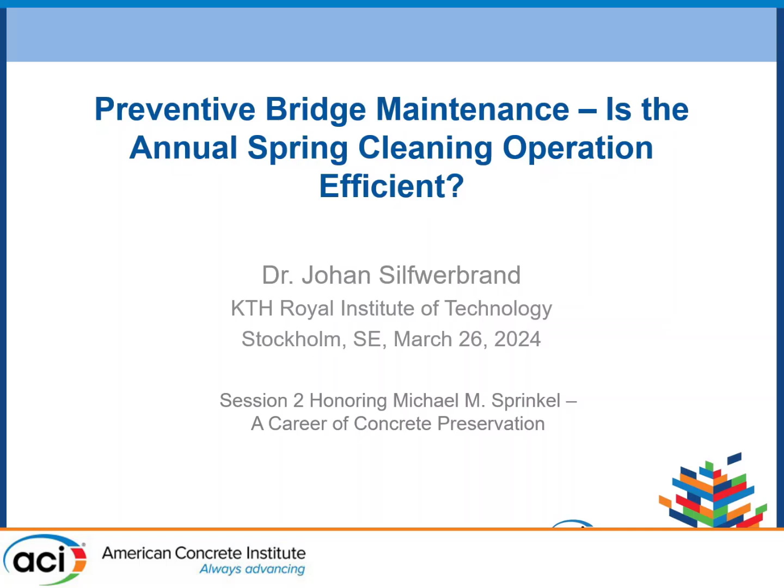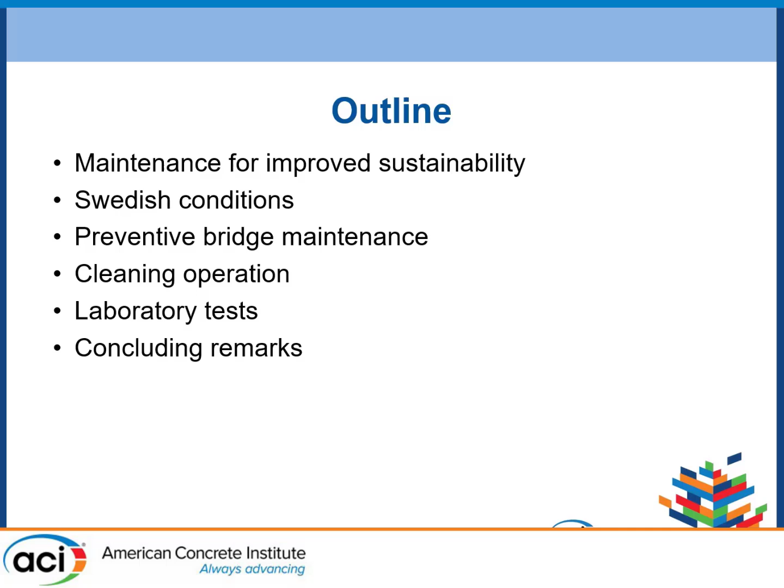So I will say something about maintenance for improved sustainability and Swedish conditions, preventive bridge maintenance, cleaning operations, laboratory tests, and then concluding remarks. But first of all, I will say something about Michael Sprinkel.

I have had the pleasure to be in the same committees as him, 546 repair and 345 for construction of bridges. And I think we had a lot of fruitful discussions. Sometimes coming from Sweden, it's not just another country or another continent. Sometimes it's like another planet coming here to all you North Americans, and you have your procedures, you have your own units, PSI, and I struggle with them. But sometimes I have recognized that you are starting to use kilogram, but that is only for carbon dioxide, kilogram carbon dioxide per cubic yard. That is a little bit strange.

But Michael Sprinkel, he had a great experience, and we had sometimes nice discussions. He was always curious, interested, and a good listener. But I remember we had a debate on how to make a crack repair. He wanted to have it with the sloped edges, but I preferred the straight ones. I don't know if we ever solved it.

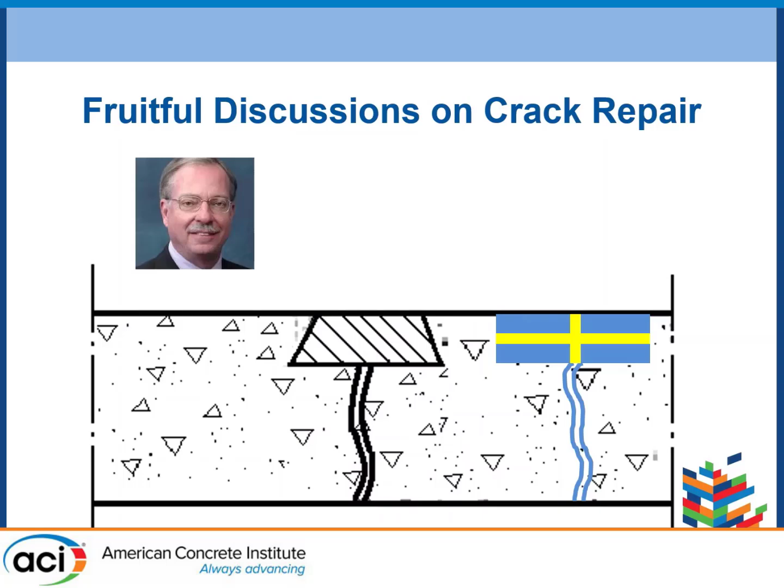So, do you know, for instance, that Portland cement is celebrating 200 years this year? Aspdin in the UK invented it in 1824. But if I go 100 years back instead, I think it was the same here in the US, that materials were expensive, but labor was inexpensive, and we made an optimization. So we tried to use as little cement as possible by using large aggregate particles, for instance, and for the rebars you didn't use the same amount at the support as in midspan.

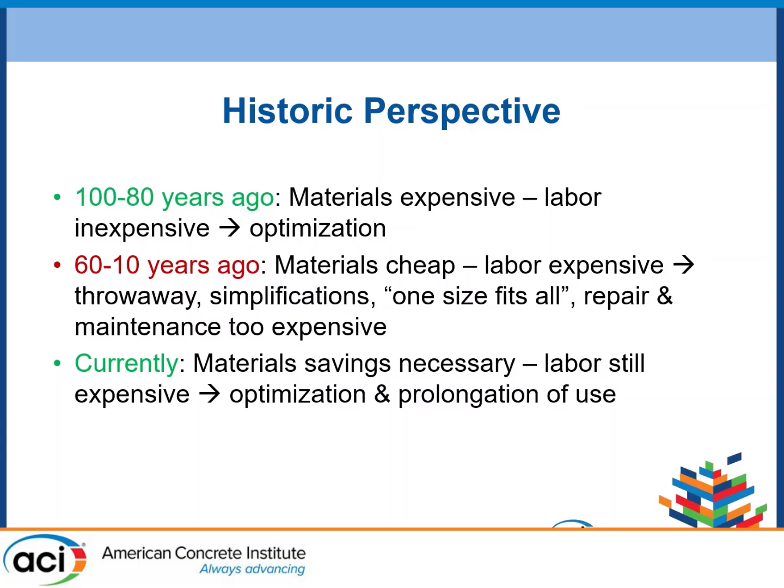But then if you go 60 to 10 years ago, the materials were relatively cheap and labor was expensive, and then there was a throwaway system. We made simplifications, one size fits all, and repair and maintenance were too expensive. It was better to demolish and rebuild. But today it is the opposite again. I think the material savings are necessary. Labor is still expensive, but we need to make an optimization due to sustainability. And one possibility is to try to prolong the use of our structures instead of replacing them.

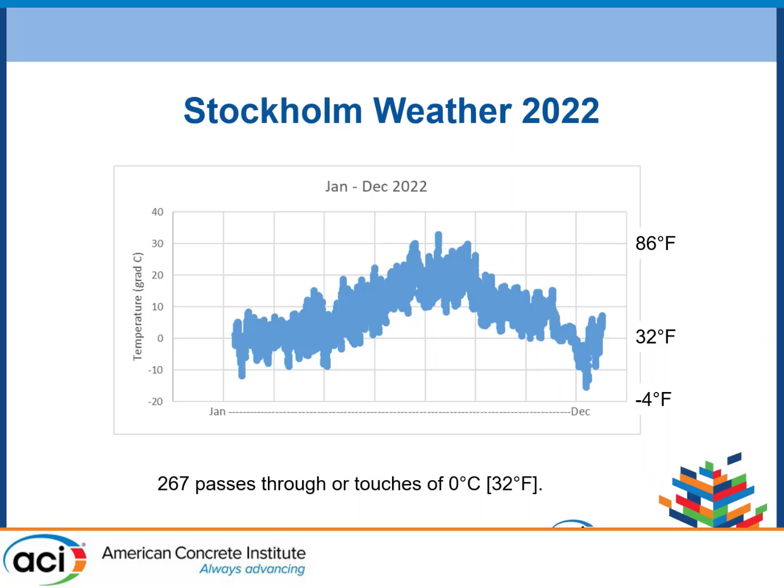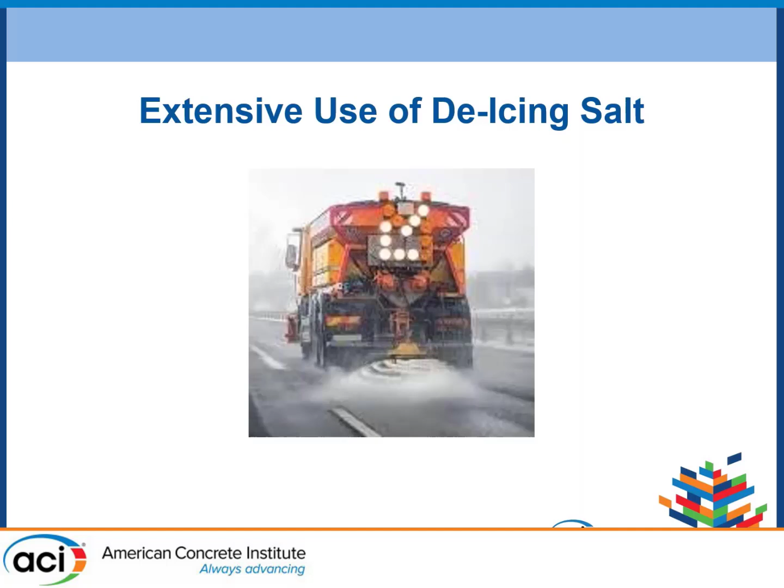So I'm coming from Sweden in the north of Europe, from the capital Stockholm, and you see the temperature during the year. If we count the number of passes through zero, it was 267 in just 1 year, and that makes the use of de-icing salt very intensive. In the north of Sweden, when it is 20 degrees below zero, we are using it much less because it has no meaning to use it. But in Stockholm, sometimes like 65 occasions every winter. And that is, of course, an extremely aggressive environment for both reinforced concrete and steel structures.

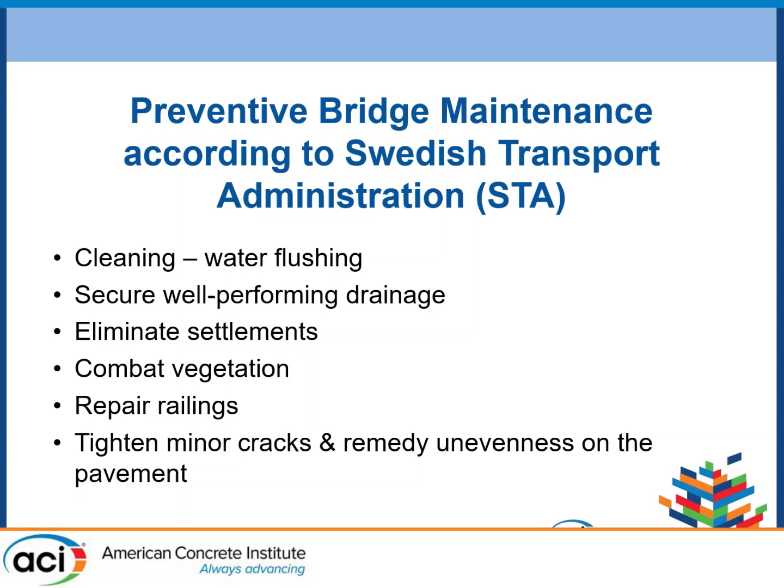So the Swedish Transport Administration gives recommendations for preventive bridge maintenance, and there are some issues you should do. Cleaning, water flushing once a year. You should secure a well-performing drainage. You should eliminate settlements. You should combat vegetation. You should repair the railings, and you should tighten minor cracks. Those are the items.

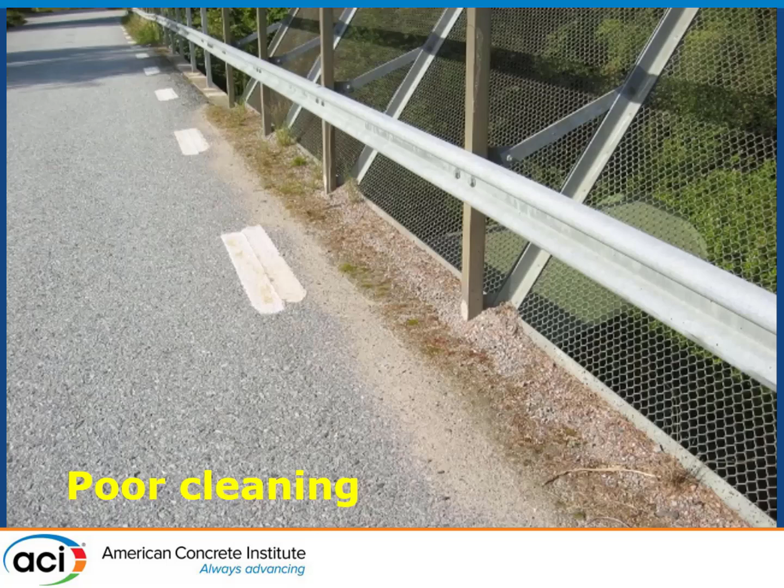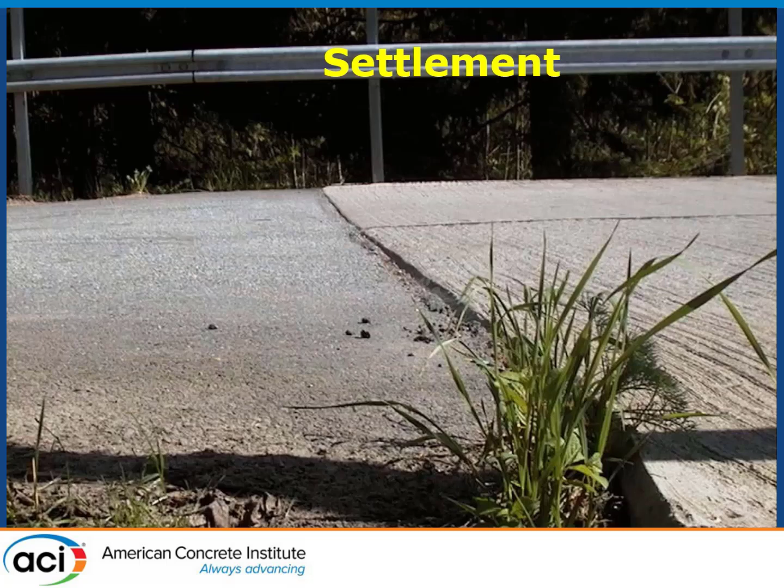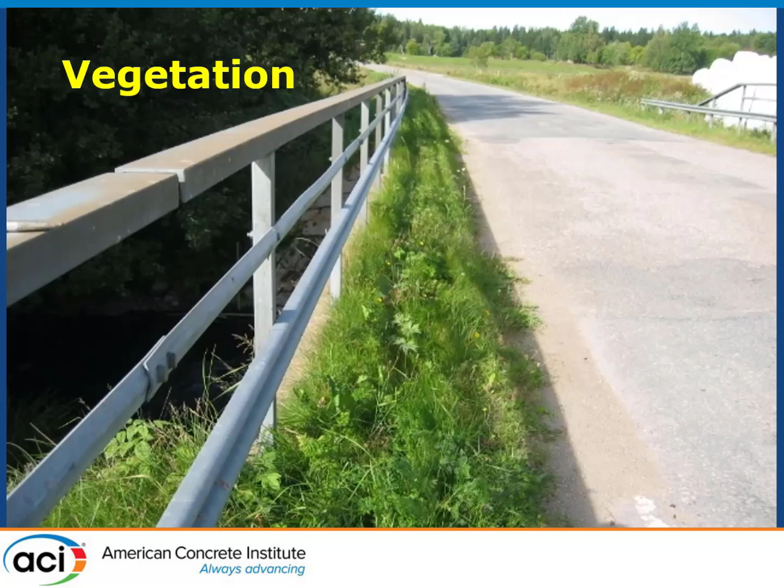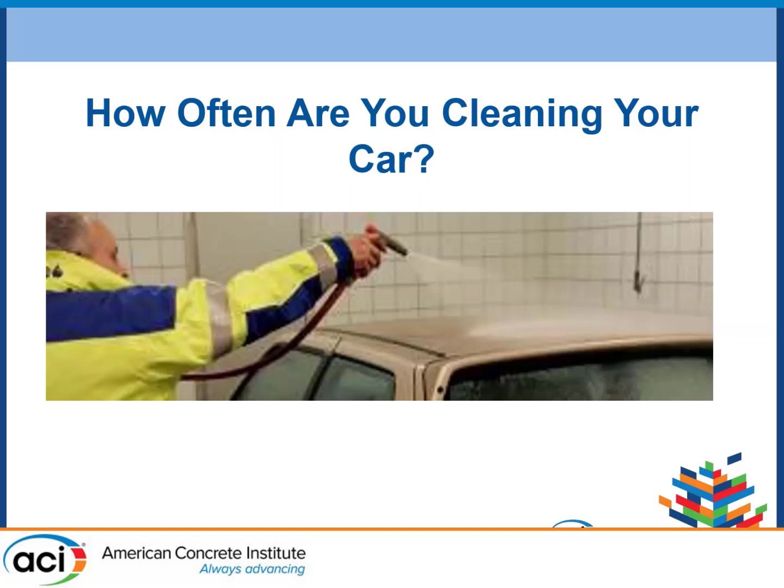And then you can ask yourself, how often are you cleaning your car? Hands up. My wife cleaned my car previous week. And how often are you brushing your teeth? I do it twice a day, not just once a year.

So the regime for water cleaning, according to the Swedish Transport Administration, has changed several times. The first time it appeared in the code was 1969, and then they said that all surfaces of a structure are to be kept free of vegetation and contaminants. And then 10 years later, cleaning should be performed after the end of the de-icing period. In Stockholm, we are using de-icing salt at least in March and perhaps in the beginning of April some years. It depends on if it is snowing.

And then in 1998, I think they were quite innovative because they said that surfaces should be 95% clean of visible contaminants. Okay? But I think that was a little bit difficult to interpret. How do you define clean? How do you measure cleanliness? When should the surface be clean? Always. Does not 5% remaining salt lead to reinforcement corrosion in the long-term perspective? So I have written a couple of papers on this.

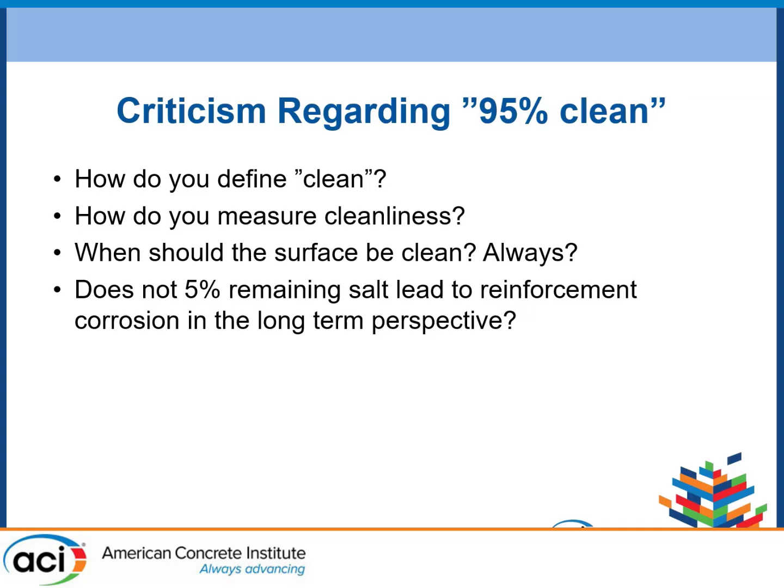And I don't know if the Swedish Transport Administration listened to what I said, but in 2013 they made a new recommendation, and now this is as far from performance criteria as you can be. Cleaning should be performed with high pressure water, 160 to 200 bars from a 150 to 250 millimeter distance. And the recommended temperature of the water should be 60 to 90 degrees, and it should be performed between May 15 and July 1st. Okay? Do you think that the contractors are following these requirements? Okay.

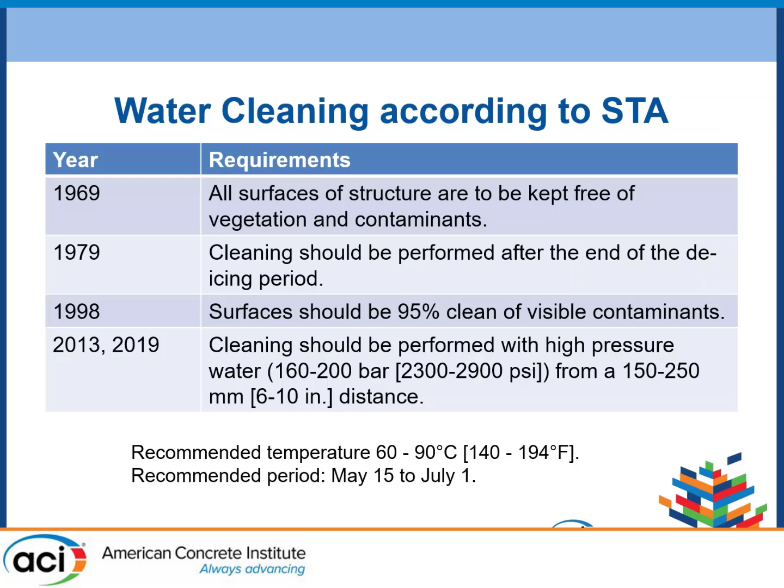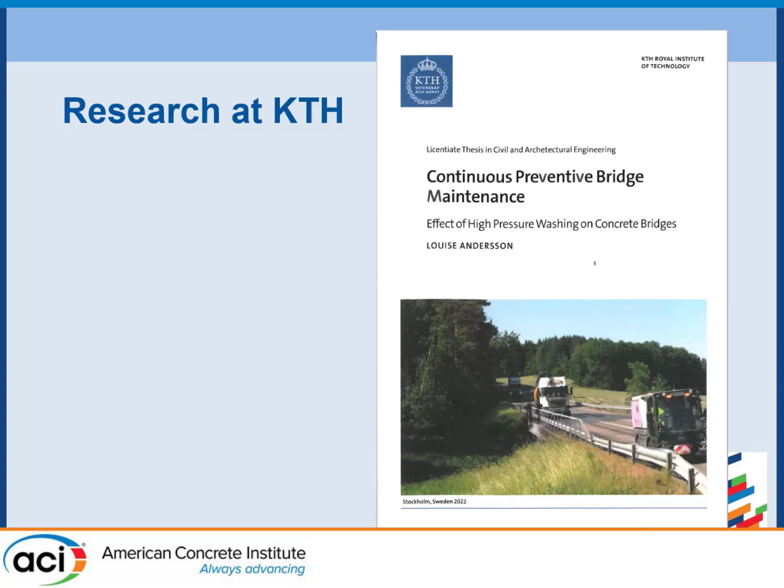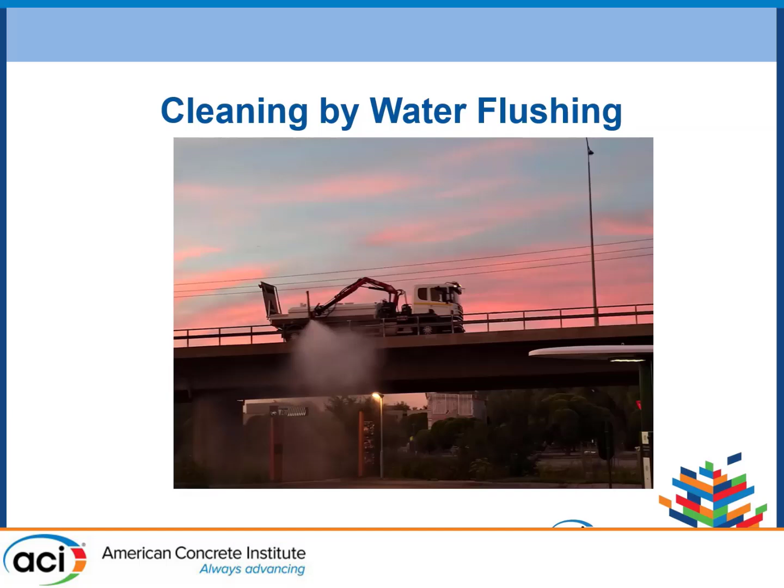So I tried for several years to receive money to do some tests on these, and finally I got money from the Swedish Transport Administration and some other partners, and I hired a PhD student, Louise Andersson, and she wrote a thesis, Continuous Preventive Bridge Maintenance. And she started to make a follow-up of how this water flushing is performed in the Stockholm area.

And then she made a field test on a highway bridge in Stockholm. It was open for traffic in 1971. It is maintained not by the Swedish Transport Administration, but by the city of Stockholm. But they are following the recommendation of the Swedish Transport Administration. There is a speed limit on the road, which is 50 kilometers per hour. It has moderate traffic, and there is extensive use of de-icing salt. It was during the winter 2017 to 18, 62 times.

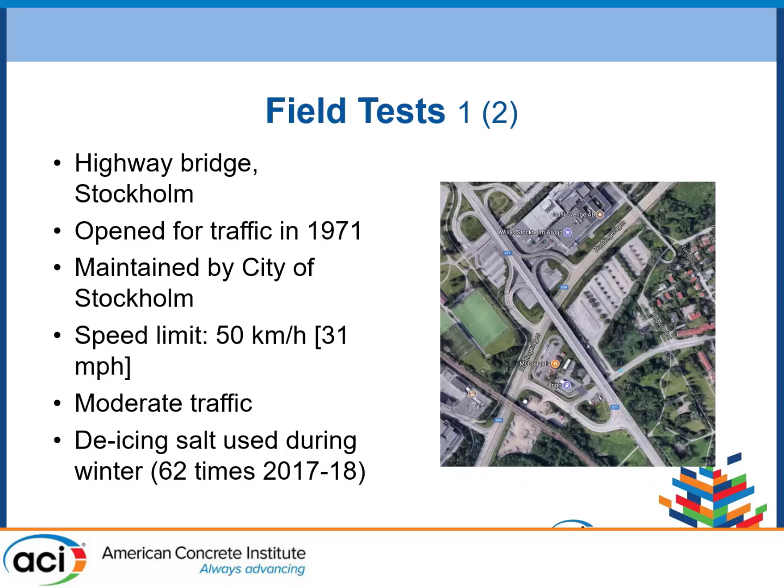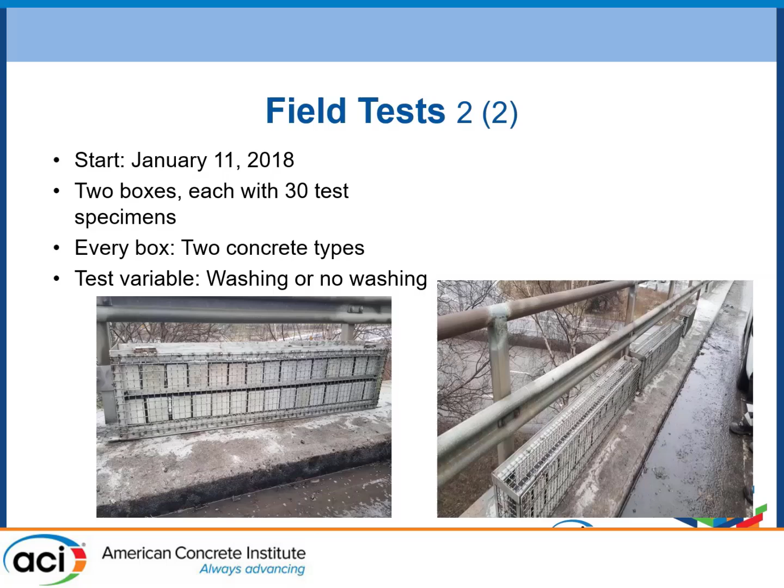And the test was started on January 11, 2018, and it consists of 2 boxes. Each box consists of 30 test specimens. And in both boxes there are 2 concrete types and the test variable, that is washing or not washing. So when the contractor comes and makes the annual washing, we protect 50% of the test specimens from being washed, so that they are still dirty.

Okay, so we tried to estimate a concrete of the type that was used in the 1960s, and at that time we used a water-cement ratio of 0.6. I'm not very familiar with your classification of cement, but CEM I, according to the European standard, is a Portland cement containing at least 95% Portland clinker, and the rest is gypsum. So that was used, and almost a similar one nowadays. But we have slightly larger cement particles now than before.

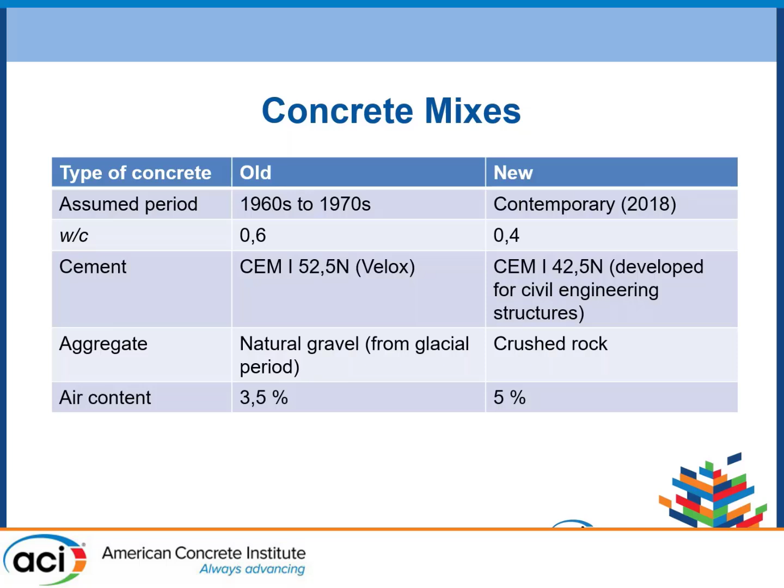And in the recommendation today, you should have a water-cement ratio not higher than 0.4. And in the old times, we used natural gravel from the glacial period, of which there are extensive resources, but they must not be used anymore. So today we are using crushed rock, making the concrete a little bit more complicated to place. And in old times, there was a recommendation of 3.5% air. Today it is 5%.

And then you can see that we measured after 2 years, there was a rather good difference between washed and unwashed, if you look at the chloride content. And measured at depth, you can see that the highest value is a little bit from the surface of the structure. Also, in the case where it's not washed, you still have the rain, which is a natural way of washing. The difference for the modern concrete was much smaller.

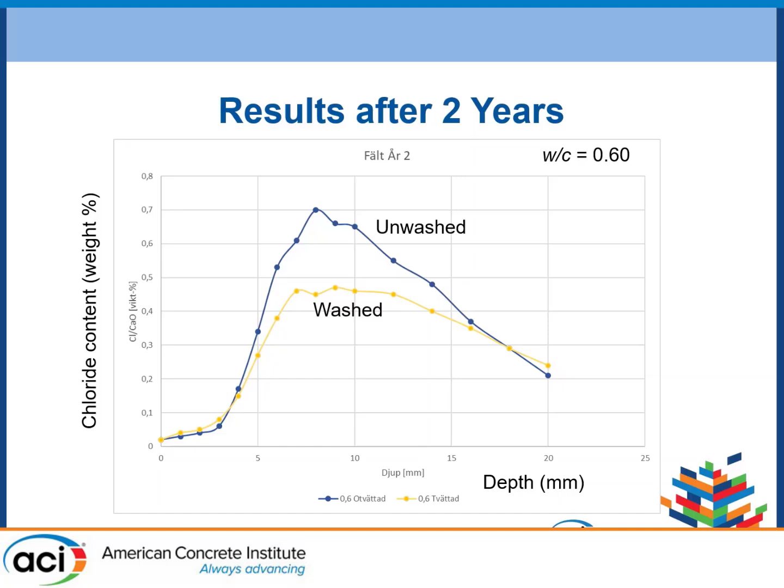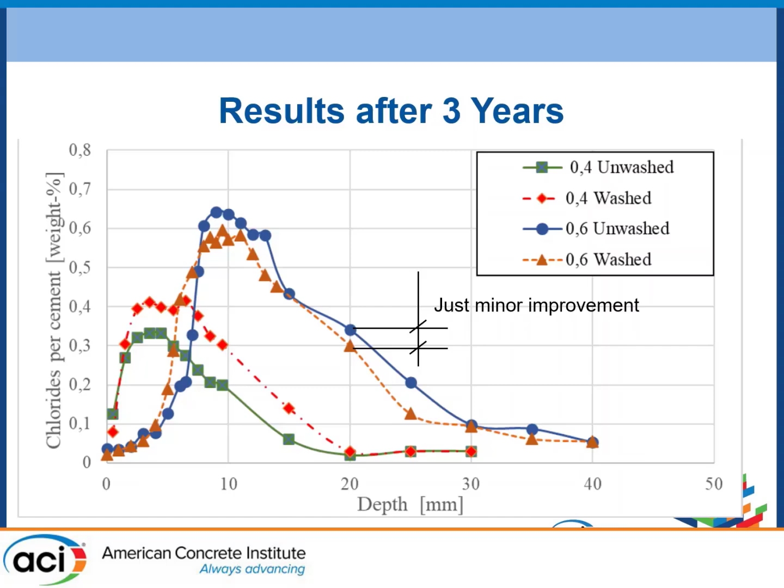And here you can see after 3 years, there is hardly any difference, just a minor improvement. So we were a little bit disappointed, of course, as we had anticipated a greater difference. But we think that it is too short a time to look at this. So we started to make trials on accelerated tests. And if cleaning is beneficial, how to make it as efficient as possible? We need to look at a lot of variables, and a field test is perhaps not the quickest way to see which one is best.

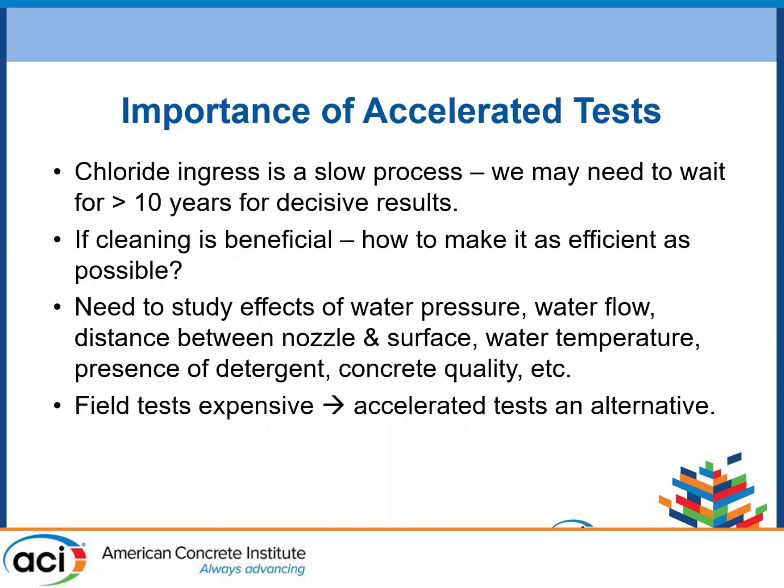So we need to study the effect of water pressure, water flow, distance between nozzle and surface, water temperature, presence of detergent, concrete quality, etc. And field tests are also very expensive. And then we developed an accelerated test method. In our case, we now make 1 year in 1 week. So we have 1 day of winter, 2 days of spring, 2 days of summer, and 2 days of fall. And you see that the temperature varies, and also the relative humidity.

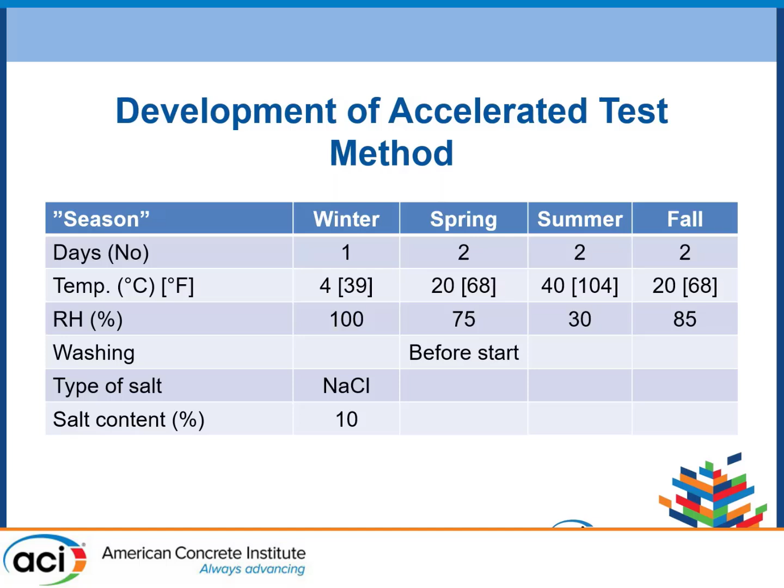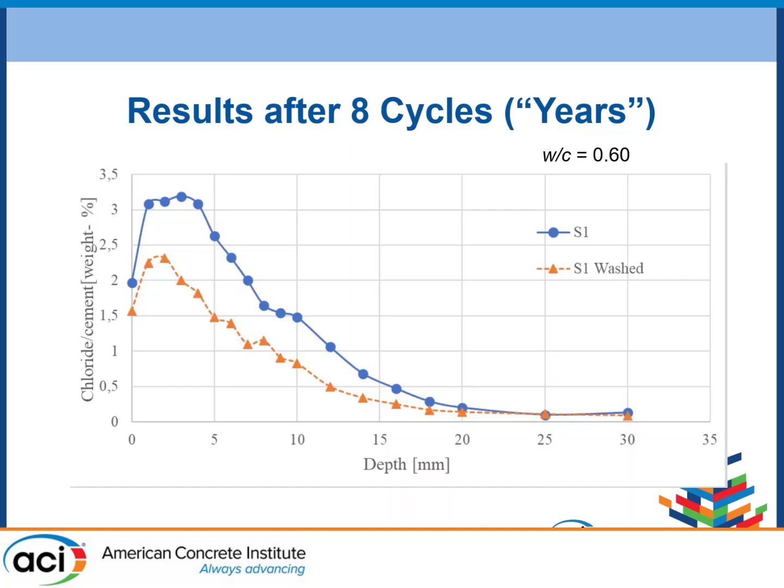When we are looking at the effect of cleaning, we are cleaning before the spring, and you see that we have a quite high concentration of salt. And here, after 8 cycles or years, you can see there is a rather large difference between washed and unwashed samples for water-cement ratio 0.6.

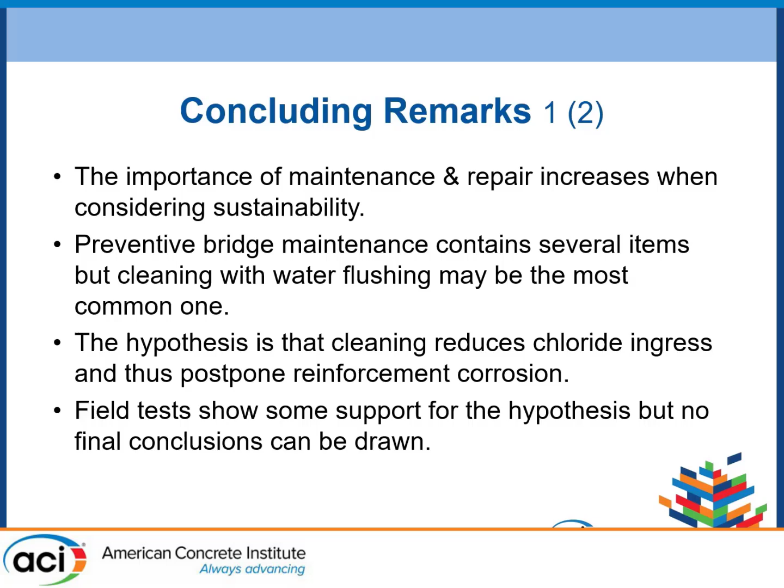And now, ladies and gentlemen, I come to my conclusions. The importance of maintenance and repair increases when considering sustainability. Preventive bridge maintenance contains several items, but cleaning with water flushing may be the most common one. The hypothesis is that cleaning reduces chloride ingress and thus postpones reinforcement corrosion. And the field test shows some support for this hypothesis, but no final conclusion can be drawn.

Yes, an accelerated test method has been developed. It can be used to test a large number of influencing factors. Preliminary test results indicate that washing has a greater effect on concrete with water-cement ratio equal to 0.6 than if you are using a more durable one. So maybe washing could be limited to old concrete bridges where you used a rather high water-cement ratio. But if a researcher doesn't say that we need more research, he will be fired. So more research is needed. The field test ought to be followed for several years, and the number of unused test specimens is still large.